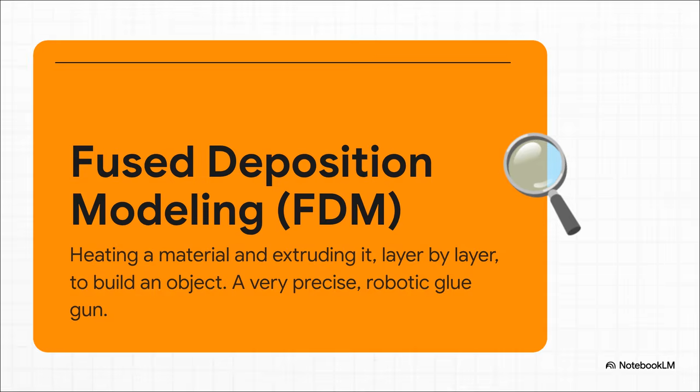Okay, first, a real quick rundown on the most common method out there: fused deposition modeling, or FDM. The absolute easiest way to picture it is to think of a super precise robotic hot glue gun. It melts a material and then draws an object with it one tiny layer at a time. And all those little lines you see on a finished print? Yep, that's the layers.

All right, so keeping that robotic glue gun idea in your head, let's meet the three main characters in the world of FDM plastic filaments. We've got ABS, PLA, and nylon. So here are our big three.

First, there's ABS. If you've ever stepped on a Lego, you know ABS. It's strong and super common. Then you have PLA, which is actually even stiffer than ABS. And finally, there's nylon, which is just incredibly strong and stiff.

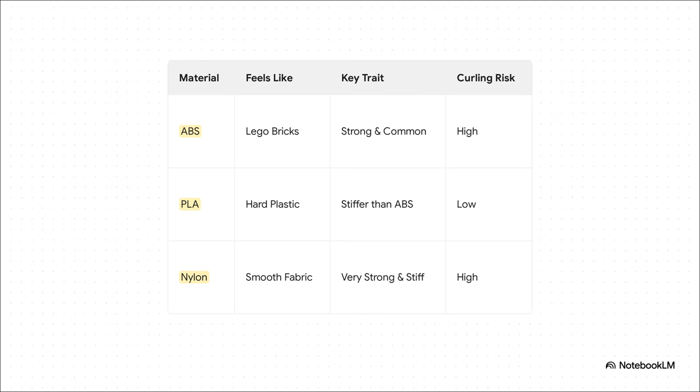But see that last column? Curling risk? For the really tough stuff like ABS and nylon, it's high. And that little detail is a huge deal. And that brings us right to the main villain of our story today, a problem so frustrating it drives 3D printing folks crazy. I'm talking about the curling conundrum.

So what causes this? Well, it's just basic physics. The printer lays down a nice hot layer of plastic, but as that layer starts to cool down, it shrinks. It actually gets smaller, and that shrinkage creates a ton of tension between the layers, especially because some materials just shrink way more dramatically than others as they cool.

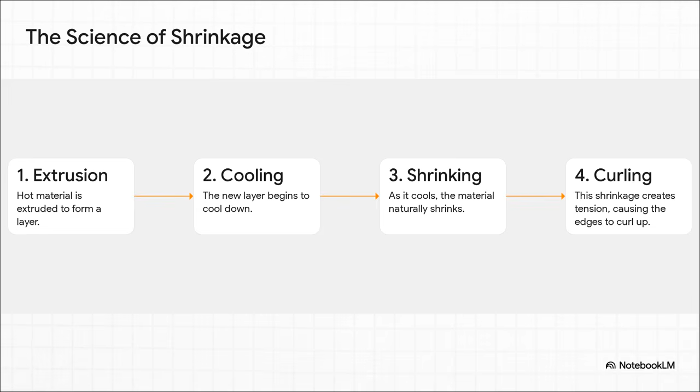Now, this tension can build up so much that the material will, and this is a quote, curl in on itself and pull itself literally off the heated bed. Imagine you're hours into a print and the corners just start peeling up, ruining the whole thing. It is a massive headache.

And this is exactly why those high-performance materials like ABS and nylon can be so tricky to work with. You need things like a heated build plate and a lot of careful adjustments just to stop them from warping and ruining your work. It's a serious engineering hurdle.

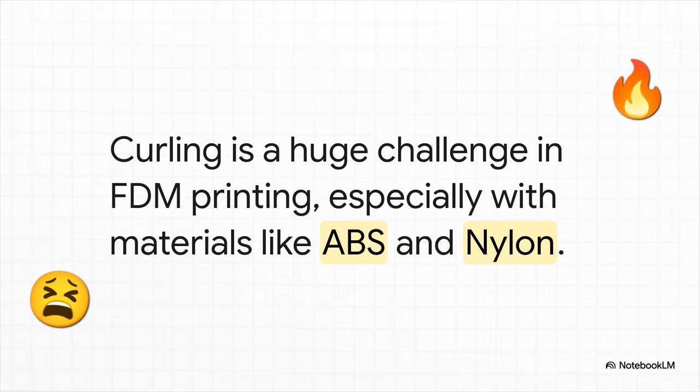Okay, so how do we fight back against curling? And how do we pick the right material for any given job? Well, it all starts with understanding two key ideas that sound the same but are totally different: strength and stiffness.

It's actually pretty simple when you break it down. Strength is all about a material's ability to resist breaking, just snapping. Stiffness, on the other hand, is its ability to resist bending or flexing in the first place. Two very, very different things.

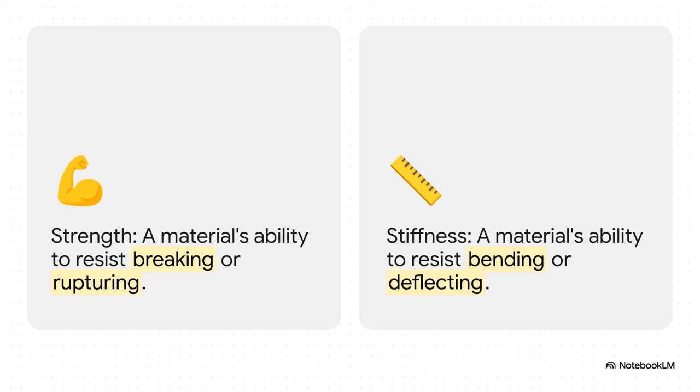Let me put it this way. Picture yourself trying to bend a plastic ruler. That initial resistance you feel pushing back at you, that's its stiffness. Now imagine you keep bending that ruler harder and harder until snap, it breaks in two. That moment, that breaking point, that is a measure of its strength. See? A material can be really stiff but not very strong, or it can be super strong but also flexible.

Getting that difference is key to making parts that actually work. Okay, so once you get these core ideas, shrinkage, strength, and stiffness, a whole new universe of incredible materials just opens up. And this is where 3D printing starts to feel like it's straight out of science fiction.

Yeah, we're moving way beyond just plastic now. We're talking about industrial printers that can build parts from metal powders, like titanium, creating these unbelievably strong but lightweight parts for aerospace or even custom medical implants.

And get this, the technology can even print with ceramics. We can now create these super complex ceramic shapes that would be totally impossible to make with traditional molds. This opens up brand new possibilities for everything from unique art to high-tech, heat-resistant engine parts.

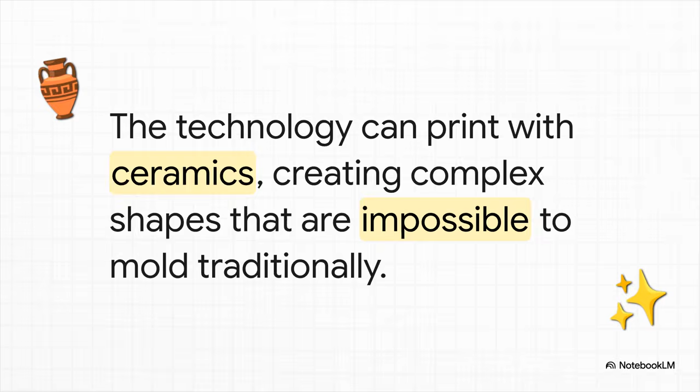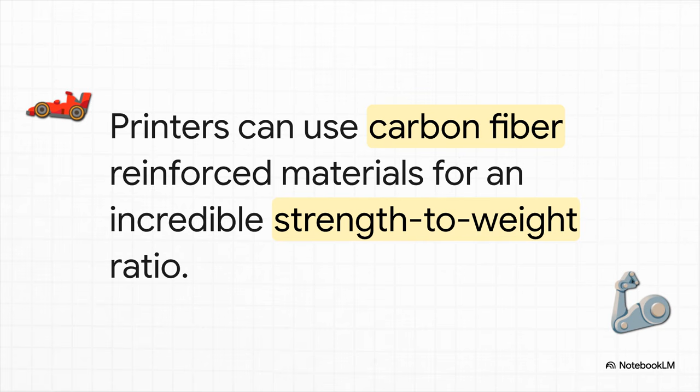What if you need something that's just ridiculously strong but also light as a feather? Well, you can print with carbon fiber reinforced materials. These create parts with an insane strength-to-weight ratio, perfect for high-performance cars or advanced robotics.

But hey, what if you want the exact opposite of stiff and strong? What if you want something bendy? Well, there are materials for that too. With names like NinjaFlex, these filaments create parts that are flexible, stretchable, almost like rubber. You could twist them right up and they'll just pop back into shape.

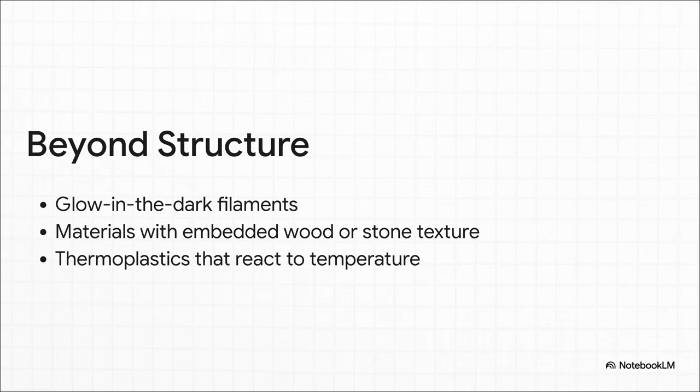And the creativity just keeps going. The options are exploding. You can now get filaments that literally glow in the dark, materials that have real wood fibers or stone dust mixed in for amazing textures, and even plastics that change their properties when they get hot or cold.

So, what's the big takeaway from all of this? It's that the real innovation in 3D printing isn't just about the machines anymore. It's about the materials. What you choose to print with is every bit as important as the printer itself. The material is what defines what's actually possible.

And that leaves us with one giant, really exciting question. We are getting closer and closer to a future where we can print with almost any material you can think of. Metal, ceramic, carbon fiber, you name it. So, if you can print with anything, what are we going to build next?